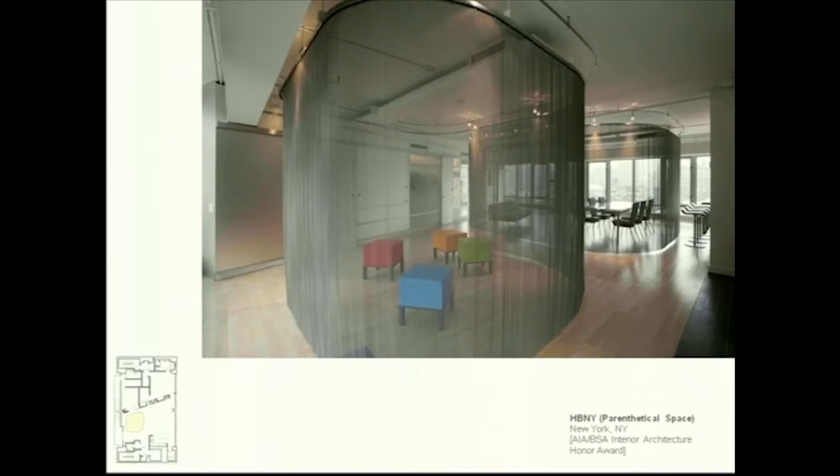The issue is owning versus sharing. This is the loft renovation we did in Chelsea, Manhattan. The client came to us — three different families were the clients, and they asked us to design a space they could share.

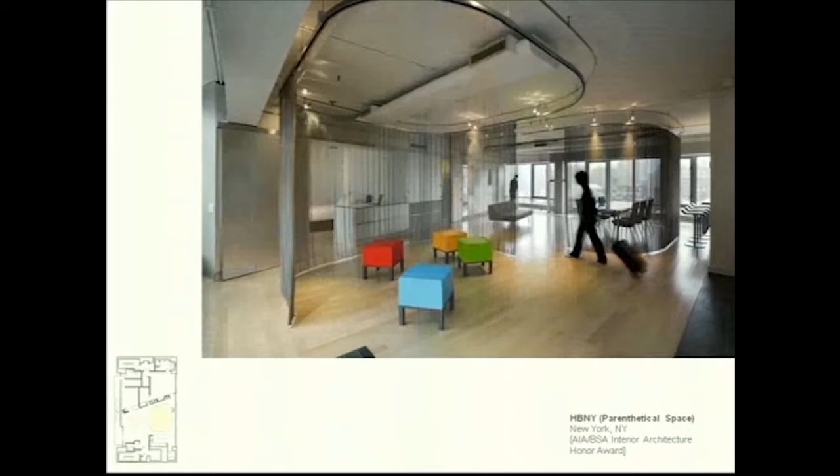Originally the proposal had several rooms for each family, which completely filled up the space. What we suggested instead was a space that could be transformed to accommodate all these different families' needs. We researched further to find the potential users of this kind of space.

We looked at this nomadic user, mapped out the type of user, and looked at the occupancy ratio — how much they actually use their own property in the city. We analyzed the setup of their space, and by breaking down those elements into a combinable space that they can share and convert to their own spatial needs, we can bring their occupancy ratio up higher. That was our argument, and we expanded it to the urban scale.

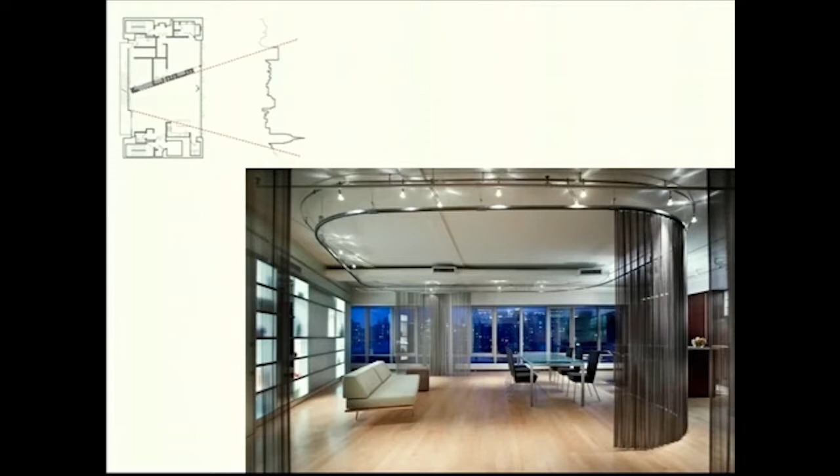Going back to the project itself, because the space has a very good view on one side to the Empire State Building, we made this diagonal wall, which consists of different programs.

Oh, sorry. Oops. Okay, sorry about that.

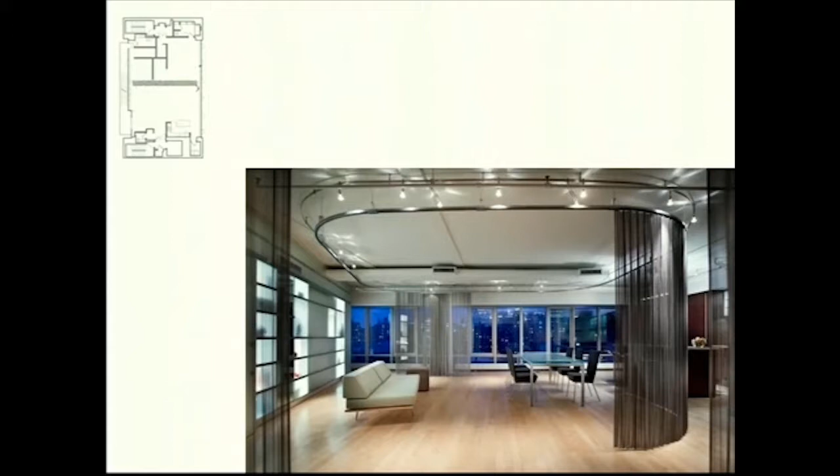So through this diagonal wall, you can have this extended view to the Empire State Building. But also that allows both rooms to have a view to the major side. Otherwise, these rooms can have only a view to the other side.

And also the diagonal wall is, in part, used as an individual locker for the different family members, so they can leave their own belongings. That brings the sense of ownership for them. So we realize this is very important to make them feel that this is their own space, although their occupancy is shorter.

So the ownership and the sense of ownership is actually important when we design the space to be shared.

Also, this aluminum mesh curtain defines and forms the different divisions, and we use the curtain with the lighting. So if we light it from outside, it looks opaque. If you light it from inside, it looks transparent. So by adjusting this lighting placement, and just by simply turning the lighting on and off, we can actually change the property of this same material to adjust the visual privacy.

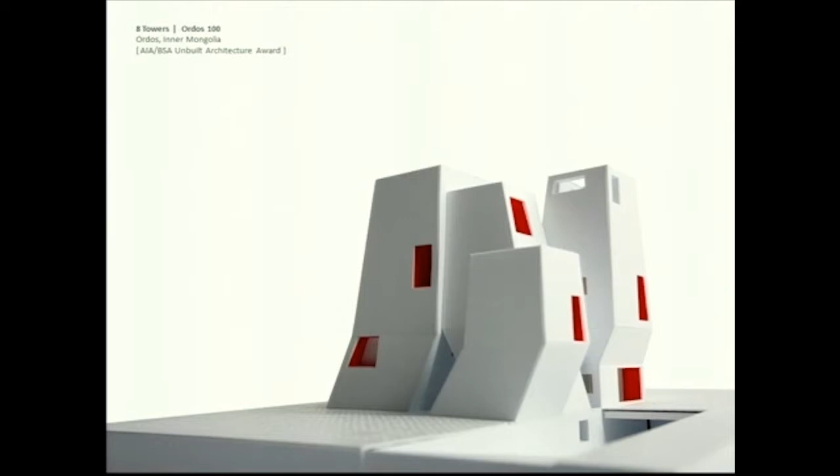Okay, so another aspect of micro-urbanism: timing multiplied by programming. We experimented with this. I don't know if you've heard about the project in Ordos, where 100 architects were invited into the desert by Herzog & de Meuron and also Ai Weiwei, the artist from China, and asked to design a villa. This was from the Ai Weiwei exhibit in Switzerland, and this is our project here.

Our model's not here yet, but we called it the New York Ghetto because somehow we had a random draw of which lot we could get. This is all kind of Ai Weiwei's doing—he also works a lot in performance, and so this was one of his ideas, that each architect would randomly draw literally out of a fishbowl which lot they would work on.

Oddly enough, all the firms from New York ended up in the same area, so we called it the New York Ghetto. But it was fun working in collaboration with our fellow architects from New York.

But the interesting thing about the site is it is isolated, and most of the clients would be actually people visiting on occasion. Similar to the project that Jinhee was talking about in New York, this project is not something in constant use. We thought this was one of the strange problems of this, and we used it as a platform to exercise timing and programming.

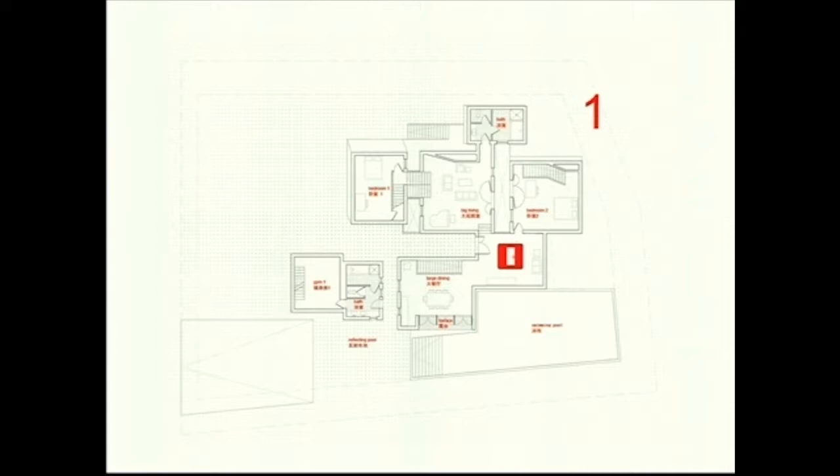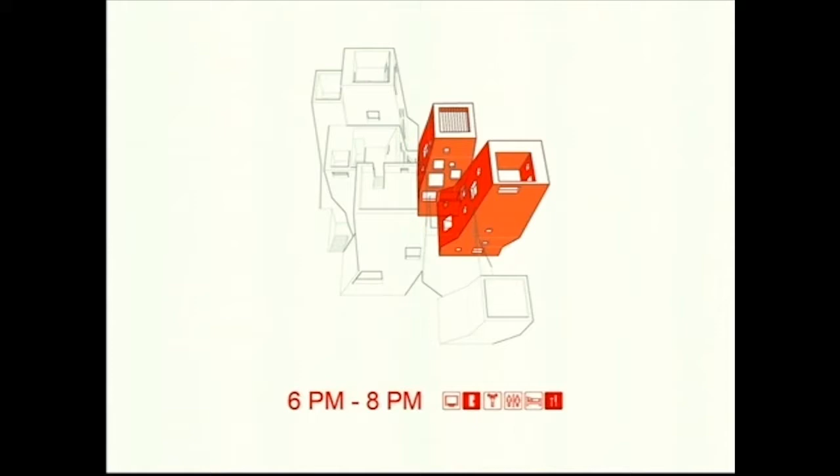And through that verticality, that stacking of programs, we were able to turn on and off the energy use of the house, so that during a diurnal cycle, only parts of the house are occupied. This was a kind of energy strategy, but also a timing and programming strategy.

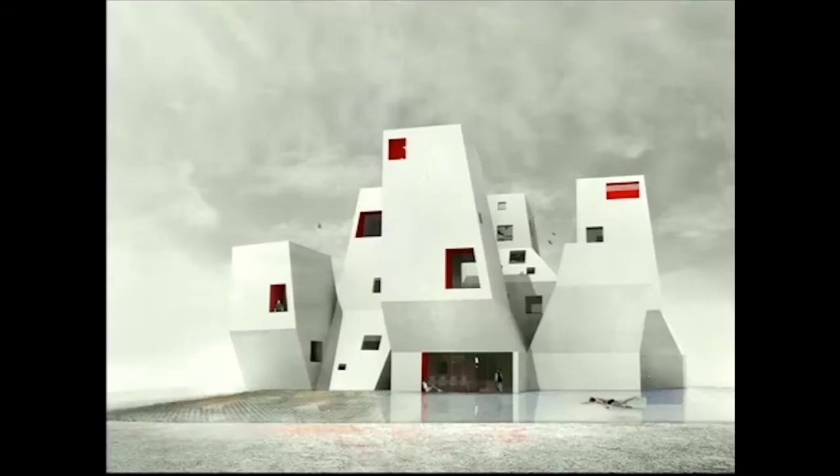And here's a view of those 8 towers. The project begins to capture this kind of vast, uncontrollable light with a series of openings that are controlled so that they give a sense of privacy, but also a sense of space, where you don't see the adjacent towers because many of these windows are pointing towards the sky. So there's a sense of openness within the kind of density we've created, but also different layers of privacy.

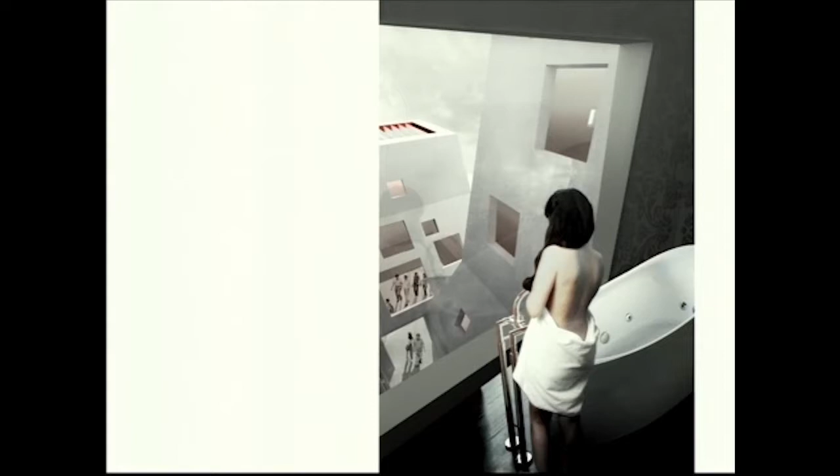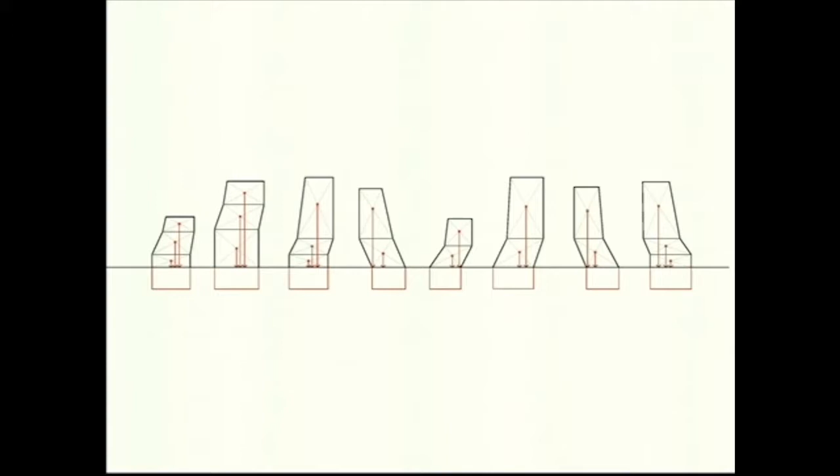We had to work with very low-tech means, so the leaning of each of these towers is based on the distance from the foundation wall. We worked with SGH, a great engineering company in Boston, trying to figure out how we can make a kind of load-bearing structure that can lean but not need any additional structure other than its own weight.

Through that leaning, the towers start from these autonomous blocks, but then begin to converge into one large building, and then begin to separate again at the roof. So they unbundle and bundle back again. Through this kind of collision, you get these separations, but you also get different kinds of adjacencies that might be unexpected.

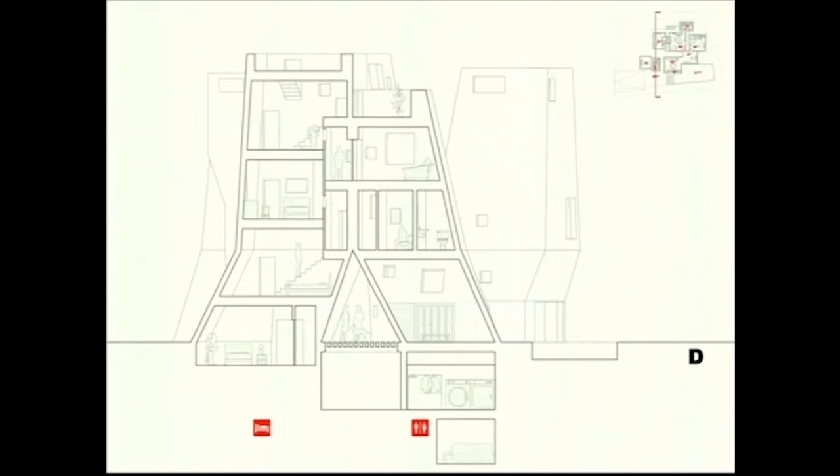We also wanted to create a kind of village feel to these towers. So in a way, the lighting of it begins to reflect from one tower to the next and make these spaces that are communal in a way. So instead of conceiving it as one large house, it becomes a kind of complex.

There's these flash floods that happen in the Mongolian desert, and we thought it was a waste to let that water just run off as it usually does, like a sieve through the sand. So by just using clay pots, which you can get locally, the water is trapped in the ground for longer periods, and that begins to regenerate the landscape.

Similarly, we're looking at this idea of division as well as continuity. Again, two terms that seem like they're in conflict, but they can actually work together.

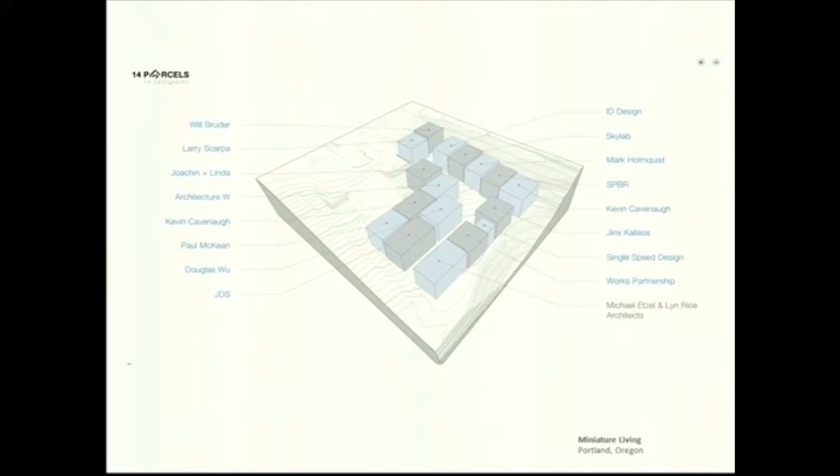We did a kind of mini Ordos project. This was in Portland, Oregon, and many of the same characters from Ordos were invited to participate in this smaller development project. Everyone wanted these kind of larger lots. Will Bruder is very famous, he gets the end lot. Julien De Smedt gets the front lot.

We didn't draw these out of a fishbowl, we kind of negotiated. But fortunately, we wanted the lot that nobody wanted, which was the smallest lot. It's 16 by 16 feet, really difficult to build anything of substantive volume in this lot. But we were actually excited by its potential, this kind of castaway lot that nobody wanted.

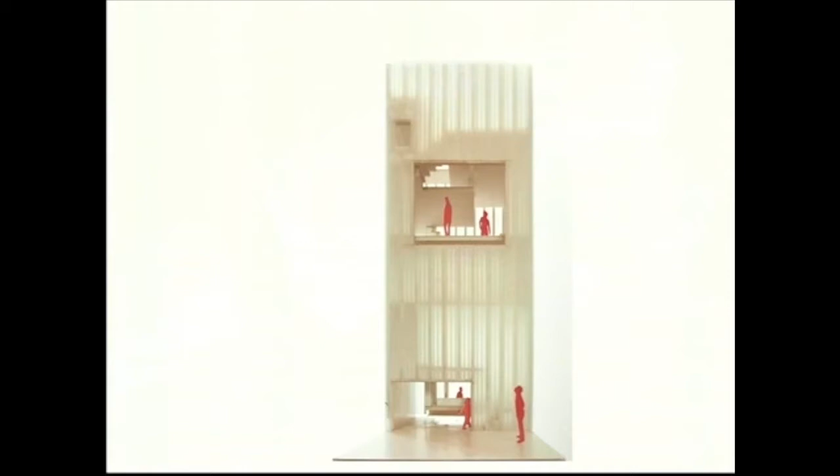Here's our little project. And the idea was that through curation, you could actually begin to fit the entire city within 16 by 16 feet, looking at the diurnal cycle as a kind of music score.

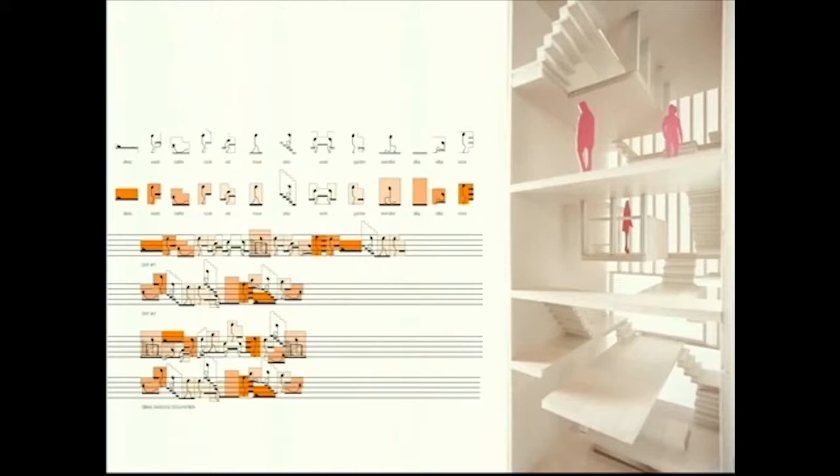So instead of there being dedicated rooms like living rooms, bathrooms, kitchens, what if we thought about surfaces that were used throughout the day and began to compose them in a kind of musical score? So instead of these rooms that maybe are unoccupied, we're actually working with surfaces that are programmatic.

At the same time, we were planning no clear glazing, there would just be shutters that you would open up. The weather is pretty mild in Portland. But what that does on the interior is create spaces that have very diffuse shadows. There's no sharp shadows.

The lack of sharp shadows blurs the distinction of space. It actually makes the distances a little bit ambiguous. So that also increases the sort of perceptual size of the space.

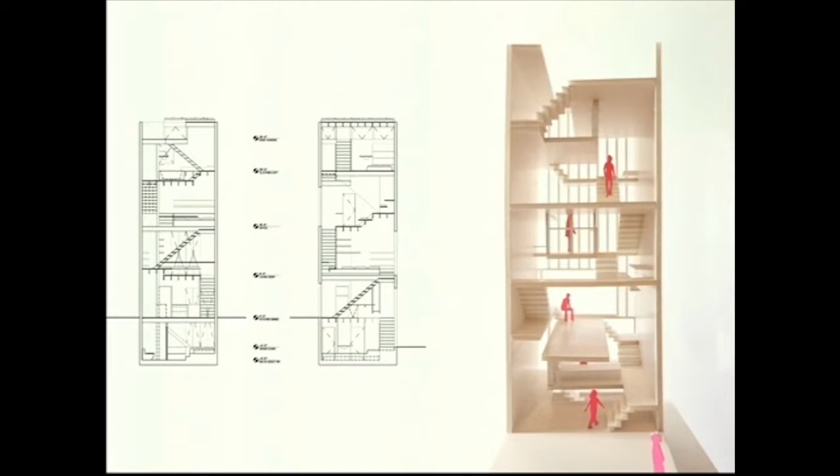We also wanted it to be a kind of toy, a kit of parts, something that you could go to the hardware store and buy. So all of it is based on dimensions of plywood and lumber that you could get from the hardware store.

Another aspect, local multiplied by global. Instead of showing a project for this one, we wanted to show a book that we pretty recently finished a couple years ago called Convergent Flux, and we were looking at the architecture in Korea.

A lot of times when you see architecture coming out of Korea in publications, there's a kind of wow factor. Like, look at all the crazy stuff that Koreans are doing.

But we wanted to put it on a global metric in a way and begin to compare the events and the kind of issues that are going on in Korea, so that we could use the rapid development of design in Korea as an example that other nations could learn from. So instead of isolating Korea as a local, unique situation, we want to open it up into a global discussion, and that was one of the goals.

And there's many contradictions that are happening in terms of the landscape in the city. I mean, you have this also in New Zealand, in terms of the kinds of density that are happening, but also low-rise density.

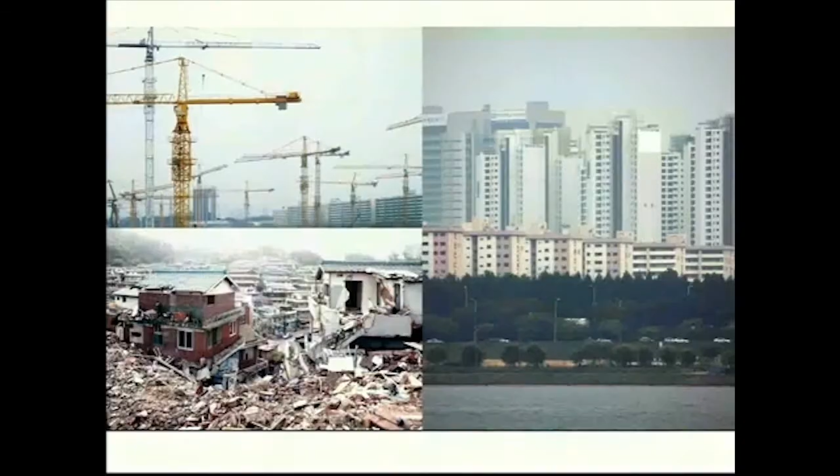The almost insane cycles of construction, urban renewal and destruction. So we began to map some of these factors out with five metrics dealing with landscape, history, materiality, and social aspects. We mapped out projects that seem very diverse and have been celebrated internationally, but also celebrated in a superficial way, looked at as unique, one-off and very specific. We wanted to tie them to other global networks and situations, and invited some great theorists to talk about the work.

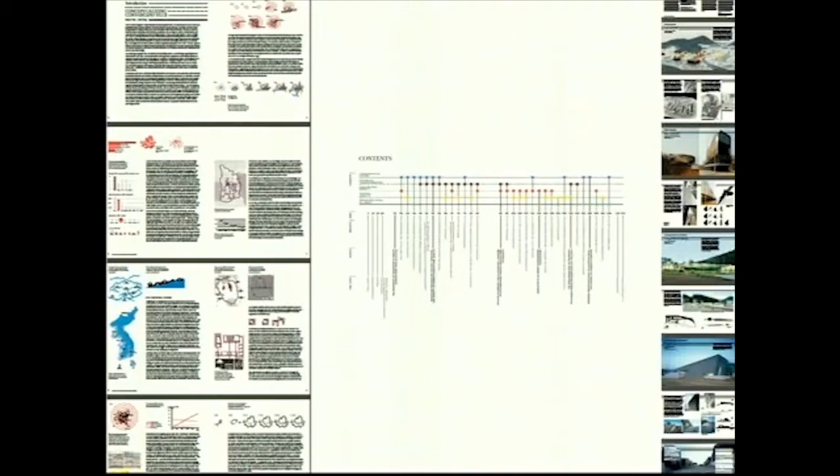So we did a series of projects in Korea through that study. Diversity multiplied by density. It's a white block art gallery that we built in Heyri, South Korea. We got it through competition, and the competition brief called mainly for flexible space.

Because the owner doesn't know at that time what kind of art he's going to want to exhibit, usually the flexibility of the exhibition space is achieved by one big empty space that can be partitioned off. But our approach to flexible space is different. Instead of making one big space, we provided many different spaces with different scales, different proportions, and different lighting conditions, creating a variety of conditions for different media of art.

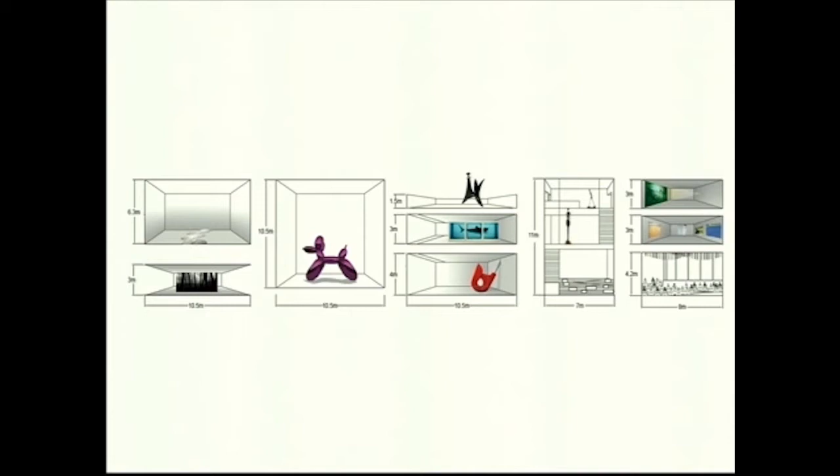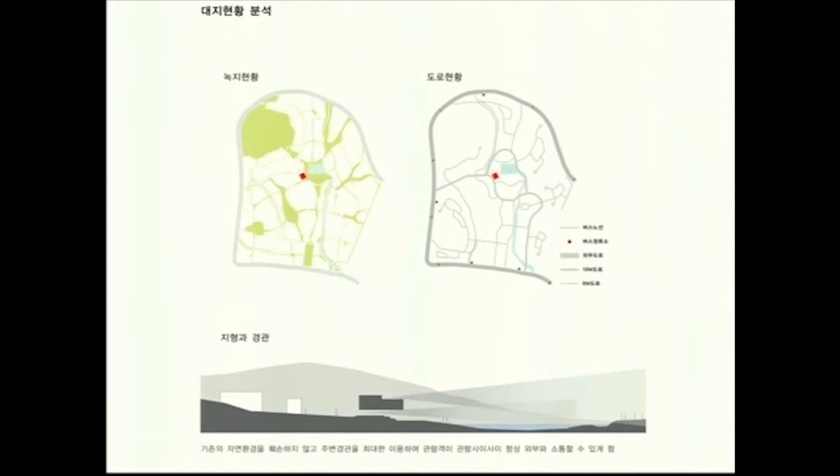The site is located in the center of the village, in front of the lake. Because of its location, it could block the view to the lake from the neighbors. So we opened up a certain part of the building so that all the neighbors can still keep the view.

The other issue of this project is that the Heyri Art Village is located near the North Korean border. You can see North Korea from the site. Through this kind of tension, if you look at just the site itself, it looks really calm, a really nice area with nice fog and nature elements.

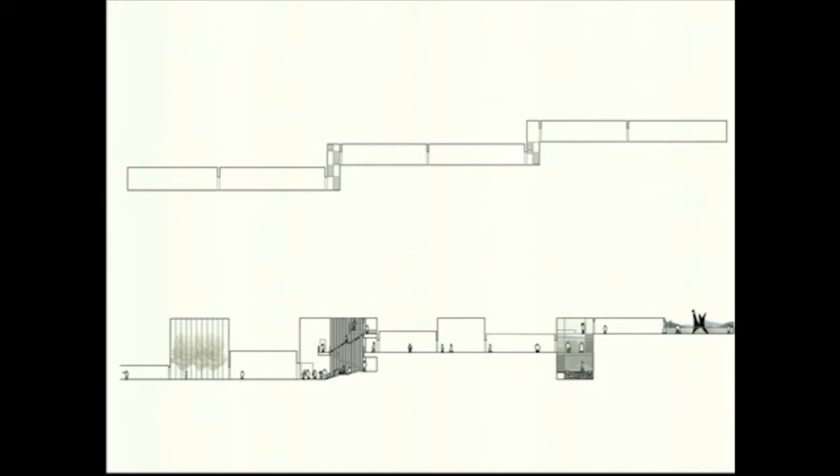But the underlying condition is that because of the military situation, there's a very strict height restriction. So to meet that height restriction and gain enough floor area for this flexible space, the conventional way is to create a flexible space that becomes a pancake-like homogeneous space. But what we propose is this series of diverse spaces.

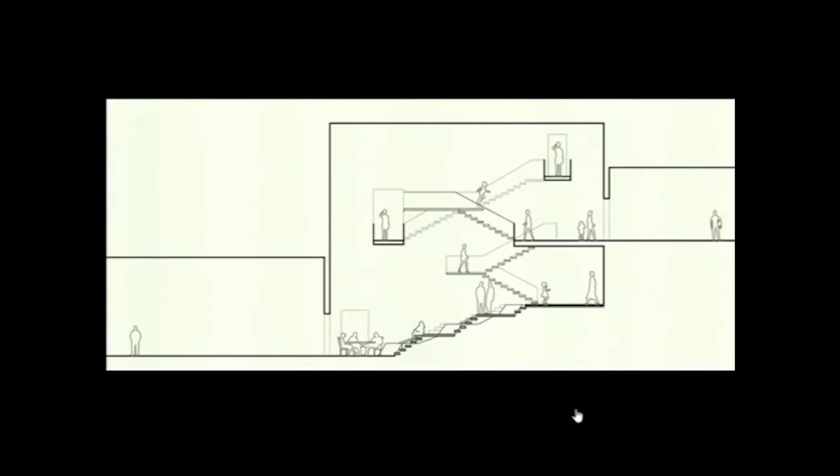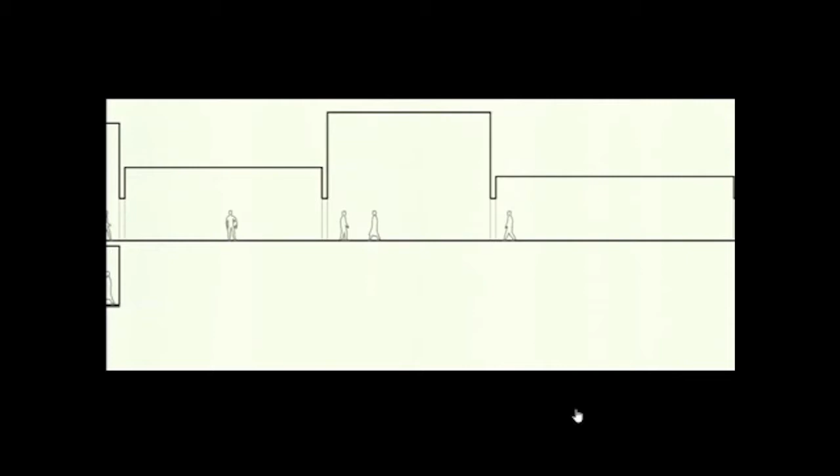Along the viewing sequence through this gallery, people can experience different scales of exhibitions and different lighting conditions. There's an enclosed box, and then you come out to a transparent box where you can see the nature. This constant shift from a very clean exhibition space to the outdoor landscape provides a very vibrant viewing experience.

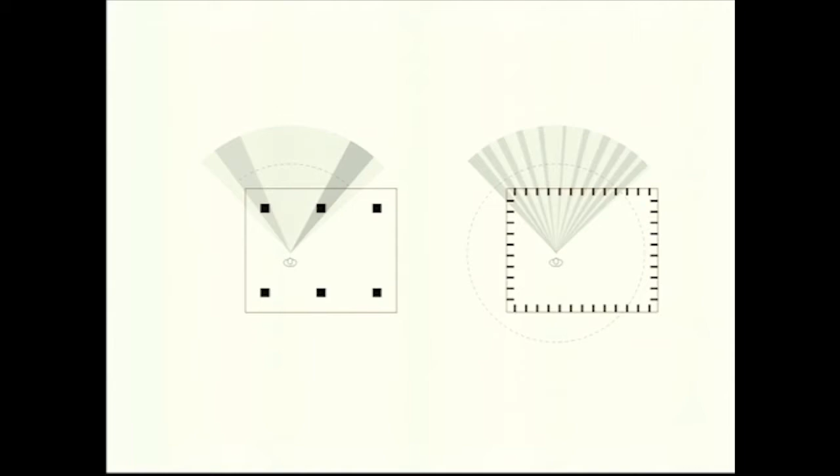Instead of having thick fewer columns, we proposed thinner but many columns to expand the transparent view. From the entry, which is hinted by curved glass, the curvature provides transparency to the lakeside. As you walk in through this diagonal glass opening, you are guided to the departure point of the whole viewing sequence.

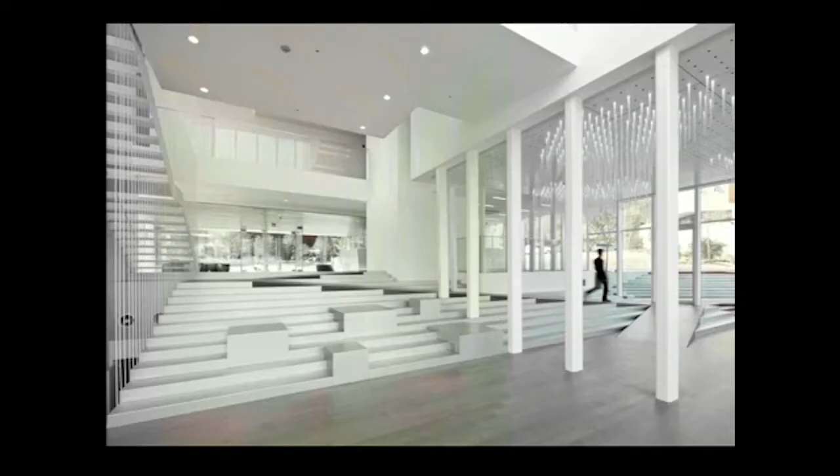Each space of this gallery is designed to become an exhibition space, and each exhibition space has a different proportion. Some of the spaces can be used as a performance space. This completely enclosed space, coming out into a transparent box that is full of natural light, brings a diverse experience into this building.

As I said, we made it so that every space can be used as an exhibition space, and even this fire stairs can be used as a nice exhibition area.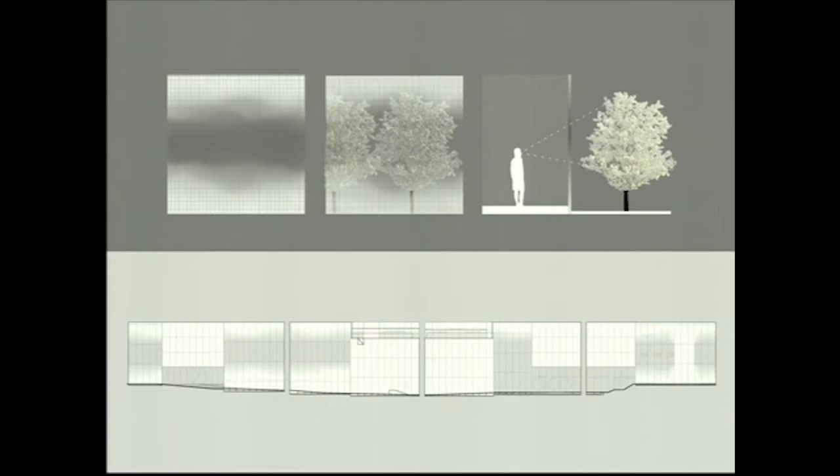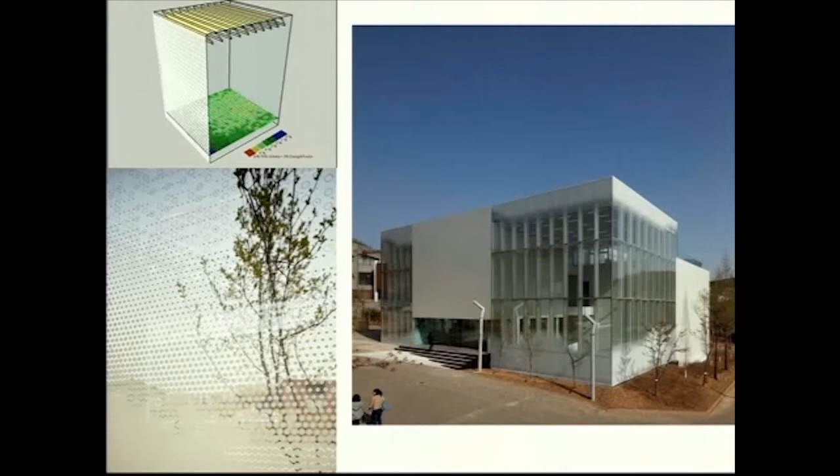One of the distinctive features of the surrounding area is the foggy weather, and we wanted to use that characteristic of nature, the fog, and also the pear blossom trees. During the blossom seasons, you can feel the transparent area of the glazing, which converts the perception of the space from the inside. When we designed this frit pattern on the glass, we actually wrote a program to define the location and density of the pattern, which reduces heat gain and also cuts glare for the exhibition.

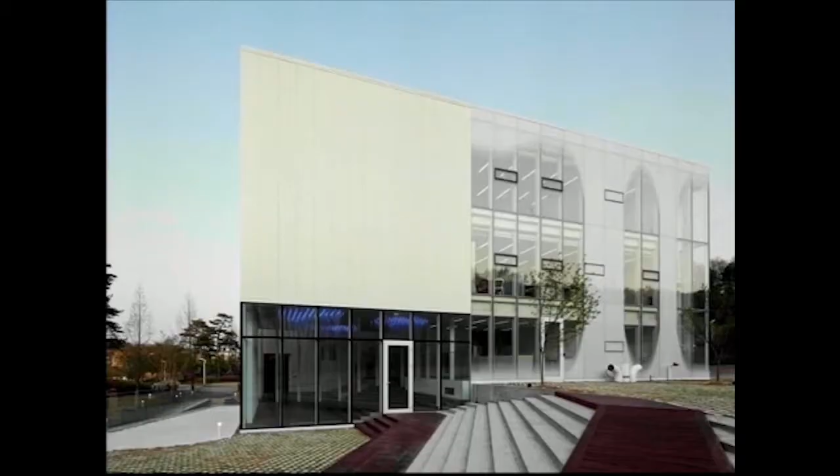Of course, there's the limited budget, so we limited ourselves to 10 plates, 10 different patterns to form a more organic expression of the facade.

And surveillance and amenity.

We're beginning to think about micro-urbanism and also the idea of the smart city. Our friends at Arup let us borrow this great diagram, where if you look at the tactics for achieving a kind of sustainable city, renewable resources is sort of at the bottom. Physical interventions can make a significant change, but the most significant change is achieved by behavior change. So we found this incredibly interesting in terms of the role of architecture, because so much we talk about materiality in terms of sustainability, but how can architecture then work in terms of changing behavior?

So in that way, infrastructure can be looked at in two different aspects. There's of course the hard infrastructure, which we're all familiar with, but also we begin to look at soft infrastructure like information, data, security, and social networks. And can that be a way that urban performance is achieved?

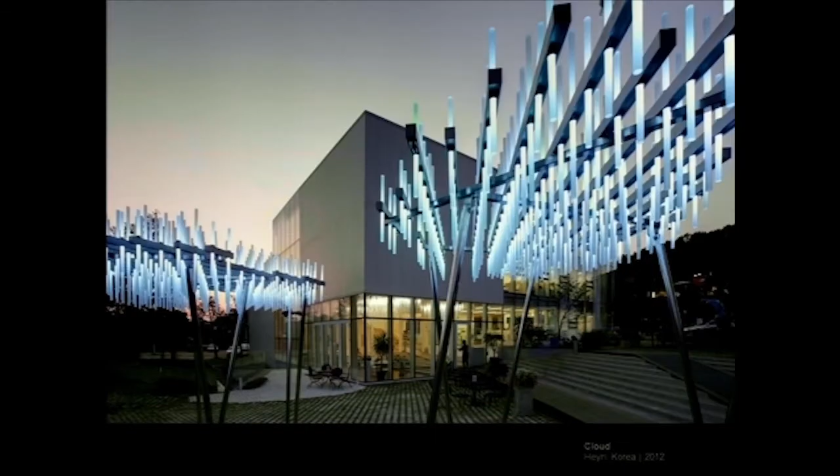So we did a project that was based on some of these notions, but also was specifically looking at security cameras and how that can become an urban amenity.

So the site itself was something that needed lighting for safety, and it connected a very important road. This is our White Block Gallery, the project that Jinhee just showed, to the waterfront. And so this kind of underutilized path, the task of the project was to make a safer path through lighting.

And so we were looking at this idea of interactive architecture and also the way in which surveillance cameras can be used - tracking movements of people, but also looking at weather conditions as well, and beginning to look at how both of those can intertwine in a new interface for lighting.

Here's the path itself. And just a second - here you see there's no people right now, but it's tracking the wind direction. And there's also a sound component as well. So, in a very simple way, it lights the path for you.

It's just the program for this. But we also wanted to, in a way, augment social behavior. So, if there's a group, they could begin to converge in the middle, and you get a kind of more animated, interactive experience if you began to come together.

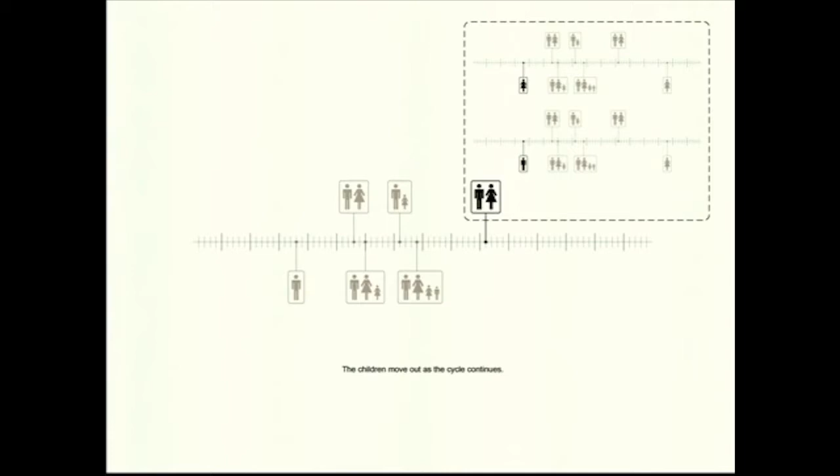And also we look at the fluctuation of family size. When you become single at the age of 18, you live alone until you get married, then you have a kid, you get divorced, then remarried, then your kids become independent and the cycle repeats again. And then through there, you become alone again. And life gets longer and longer.

So that's the whole fluctuation of family size. It happens more and more, and the duration of living in a smaller scale of space gets longer and longer. So our ambition is how to make this new prototype that can accommodate all this different change in these days.

And also what we looked at is the condition of this residential district, the ground level condition, because of the parking requirements. If you walk down to this residential area, although it's a residential area, what you see is parking - an endless parking lot on the ground level. So there's no sense of community, no interaction between the neighbors. So we wanted to bring the program down to the ground level as much as we can, and that's one of the reasons why we made our unit small, because the area of the unit actually triggers the number of parking requirements.

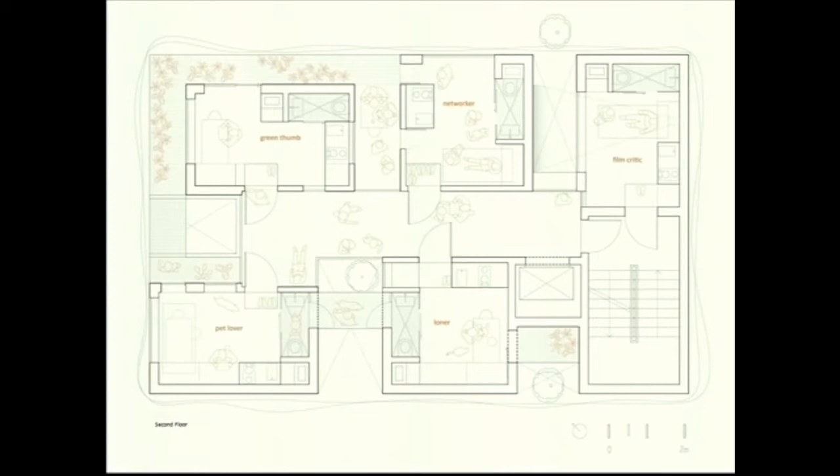This is the space that shows the in-between space, the tapioca space. Through there, opening the door to this tapioca space also becomes a window when the user flips out the desk, so it can be used in a different way.

There's also the idea of combining small units to become bigger units. This is one of these combined units that becomes a one-bedroom space, and depending on how you combine these units and combine them later on, there's flexibility in this system that can react to different needs throughout your life cycles and the change of your family.

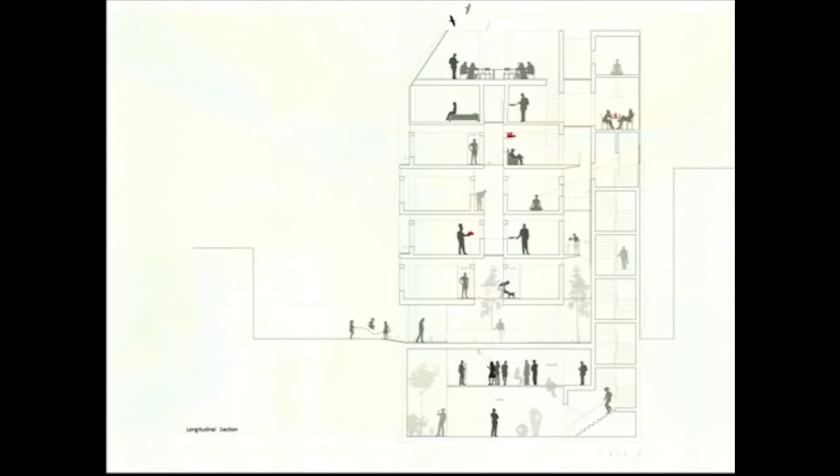The potential use of the space and the boundary of the space can go beyond the physical boundary. For instance, this unit is located in a very hidden area, but still they can have a view through this fire stairs up to the sky—view, natural light, natural ventilation. These are actually the major elements that bring quality of life in this very small space.

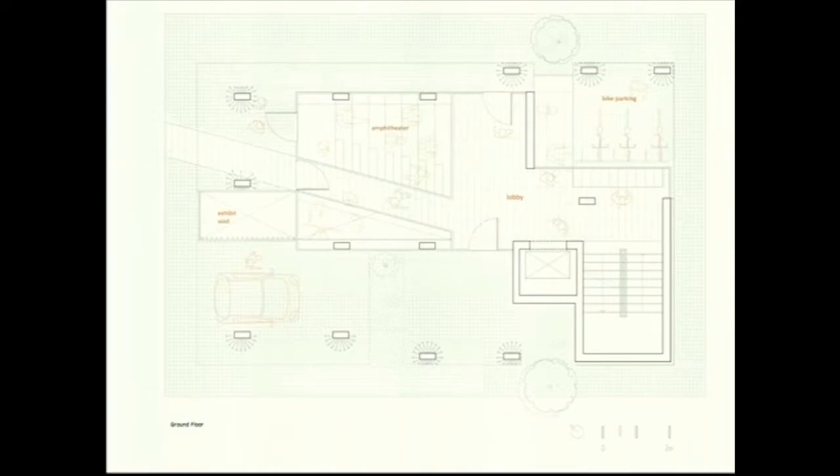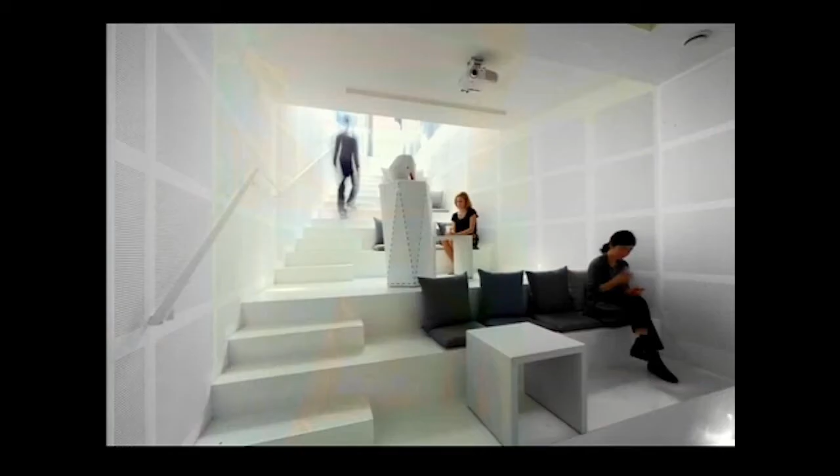From the ground floor, we brought down the program to the ground level. Underground there's a cafe and galleries, a micro cafe and micro theater that can be used as amenities for the residents. From the street we can enter through this cafe—it's used as a cafe during the day and as a theater during the night. So there's multiple use of the same space that brings up the efficiency of the use of this kind of space.

For the screen, we took cues from the context—there are a lot of informal ways in which these spaces don't really belong to one property or the other. Of course there are property lines, but they're appropriated in many different creative ways in terms of the edge condition.

There are many ways in which the screen functions—it can be a balcony, it can be security, and so on. In a way it extends the boundary in different kinds of ways, whether security or balcony. We wanted to do the same thing with our screen, where even though it's a homogeneous system that wraps the whole building, there are subtle variations that allow it to be something you might grow something on. The railings actually drain and guide water back down to the ground. There are security bars over certain lower units, but it can also become a kind of bike rack.

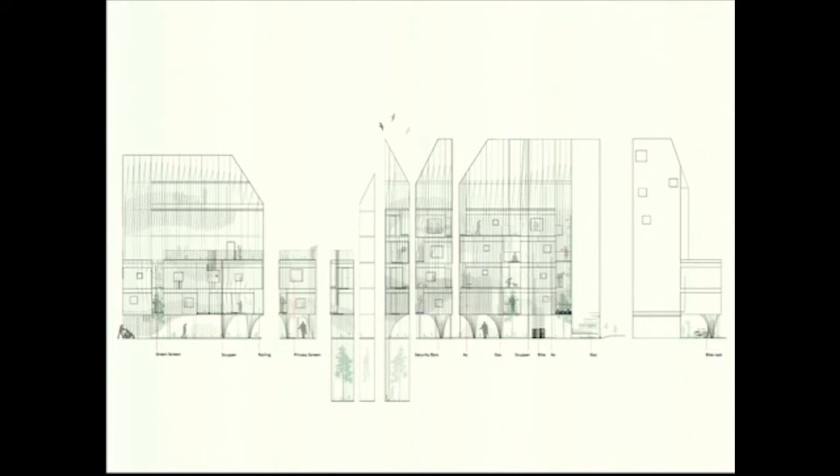The units themselves become very flexible—we wanted every unit to actually have a living room, a bedroom, a kitchen, this kind of thing. By folding out the furniture you can have these different activities.

Quick little breakfast, say hello to your neighbor, and off you go.

In terms of the social space, the doors themselves—this was a kind of required corridor space, and you can see how small the units are in relation to the required corridor. Actually, we were able to extend these a little bigger. So in terms of this idea of tapioca space, you can use the doors to begin to reconfigure different kinds of social arrangements.

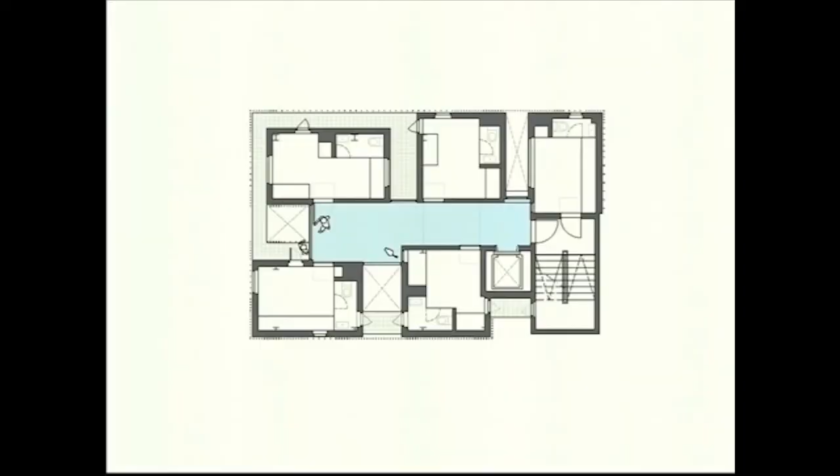And so here's that corridor space right now—this kind of thing.

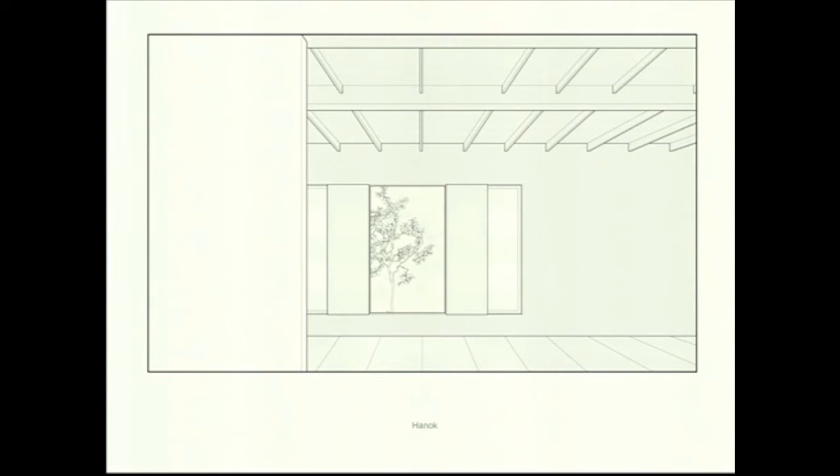The boundary can also be achieved by different means, not only physical walls or windows. The opening can be used as a screen, or the door or curtain can create a boundary without physically closing off.

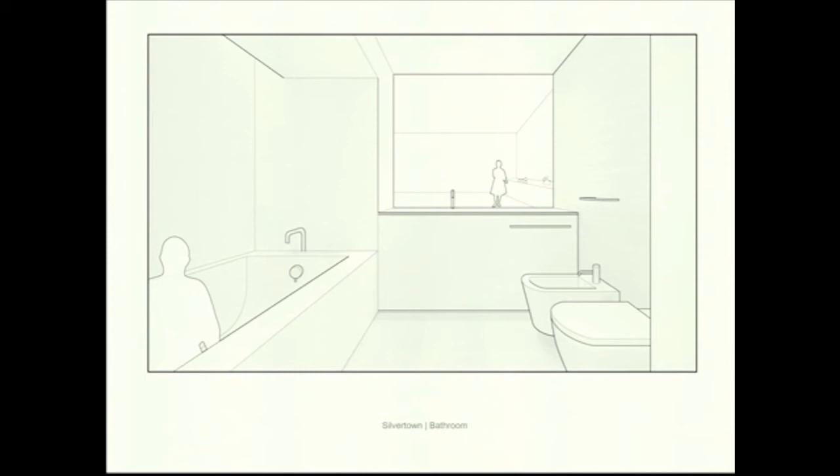Even the idea of privacy can be approached in different ways. For example, in the bathroom, a very private space, the window can be used as a display of different information, and it can become transparent so you can watch the elderly or children while working on the other side, creating a different kind of virtual environment.

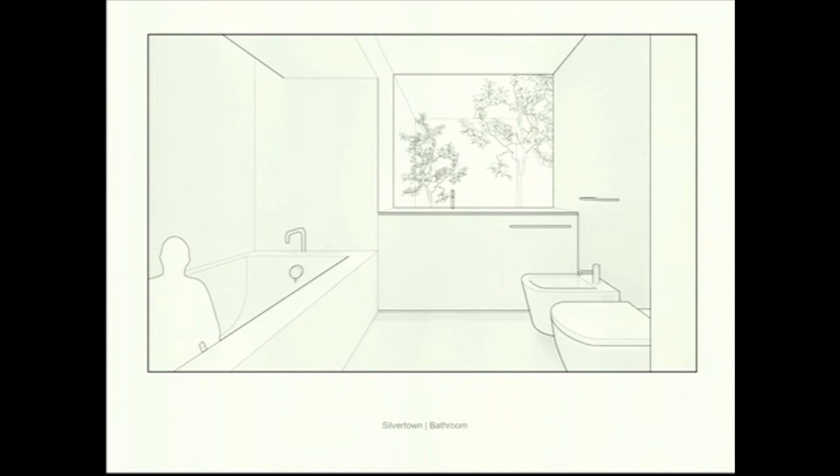So we are now researching further to expand this possibility of micro housing. That's it. Thank you.